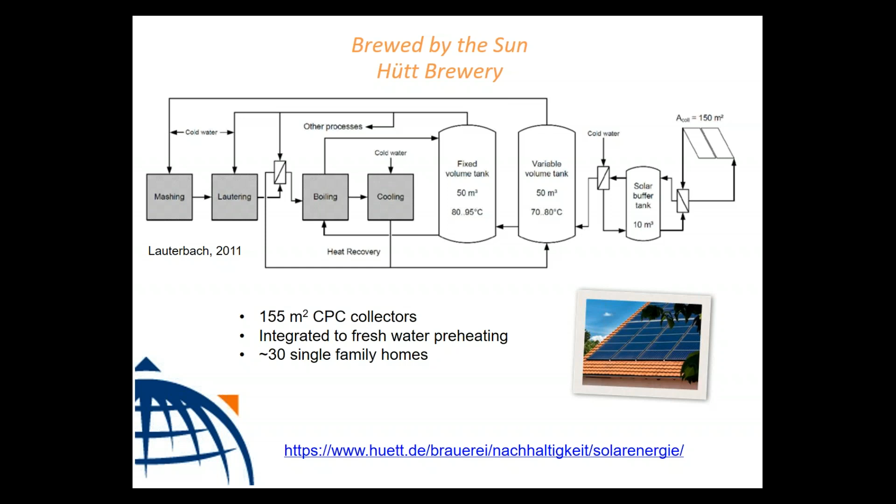If you want more information about this project, please check the link below, and also check out Project Green Foods, which is an EU-based project focused on energy efficiency and low carbon heat integration into the food and beverage industry within Europe. Next slide.

So the second brewery example here is the Hofmühl Brauerei, located in southeastern Germany in the Munich area. This was one of the first real large-scale solar thermal projects within Germany, almost over 10 years old now. This collector was extensively put onto the rooftop to serve a number of industrial processes within the beer brewing process.

Mainly the preheating of water, but also the heating of the cleaning-in-place tanks for the evening cleaning processes. The benefit of using CPC collectors, which stands for compound parabolic concentrator, is that these are a slight concentrating device with a mirror behind the vacuum tubes. The benefit of these is they allow for a higher temperature up to 130 degrees Celsius, which allows for a higher level of thermal storage.

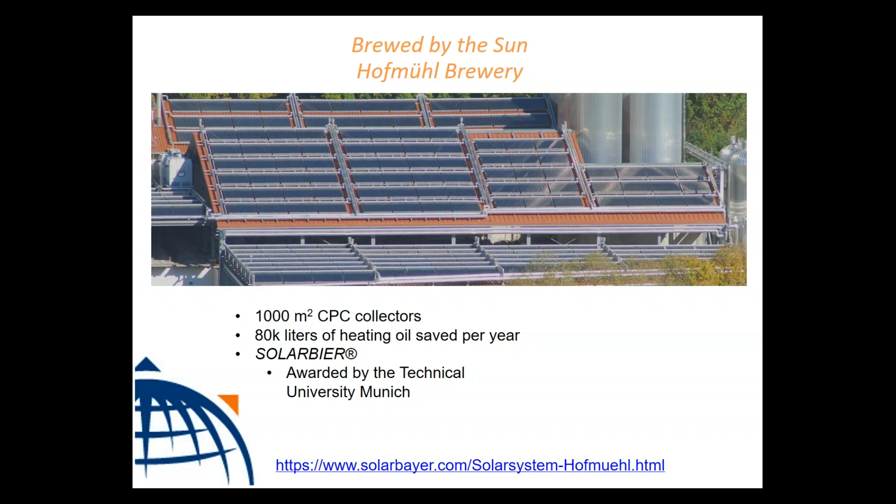Next slide. Finally, this is the Gösser brewery, located in Austria. This is quite an interesting project. There's been some good research done in this green brewing concept, available online, to find ways to make the beer brewing process as sustainable as possible, and to use as few fossil fuels as possible to generate the beer that we drink.

There are three unique aspects, or main heat sources, for this beer brewing process. One is solar thermal, and as we see here, there are around 1,500 square meters, about one megawatt of thermal energy possible throughout these flat plate collectors, hooked up to a large industrial storage in the background. What makes this project even more unique is that it's integrated with a district heating loop nearby, but also an on-site biogas project.

What they do here is use the waste grains, or spent grains, and put them into an anaerobic digester to make biomethane, which can be burned either in a CHP to generate both heat and electricity, or in a traditional boiler to generate heat for the various beer brewing processes.

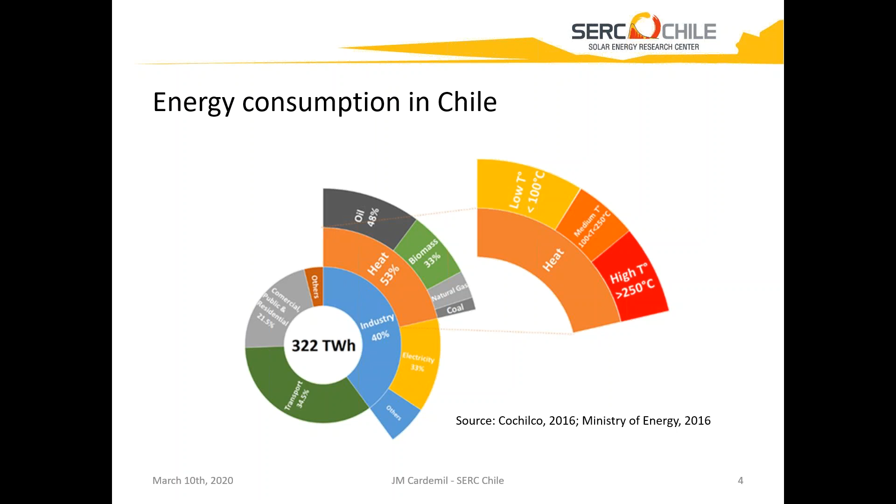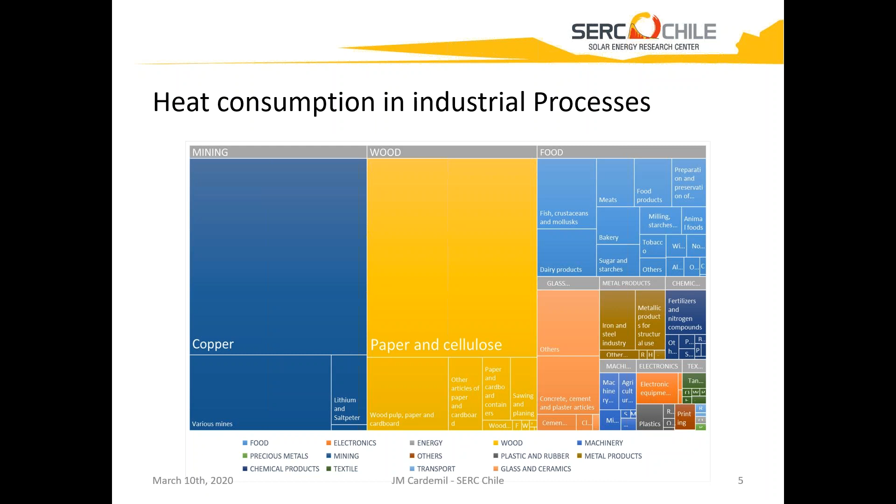Regarding the Chilean situation, it's really similar to what is happening worldwide, where about 40% of the energy is consumed by industry, and much of that energy is used as heat. But in Chile, particularly, most of the heat is consumed at a very low level of temperature, because the copper mining industry is the largest energy consumer in Chile, and they consume a lot of heat for their processes. The interesting thing is most of the heat consumed by the copper mining industry is about 40 to 50 degrees Celsius. So the opportunities for solar in these processes are huge.

Regarding the copper mining processes, I need to explain a little bit because it's not as common as, for instance, beer processes. The production process for copper depends on the ore being processed. Copper is present in the environment in the form of oxides or sulfides. The process for refining copper depends on whether you're processing oxides or sulfides. Sulfides require low heat for that process, except for the smelting process, which is highly energy consuming, but operates at about 1,000 degrees Celsius, so the opportunities for solar are not really evident there.

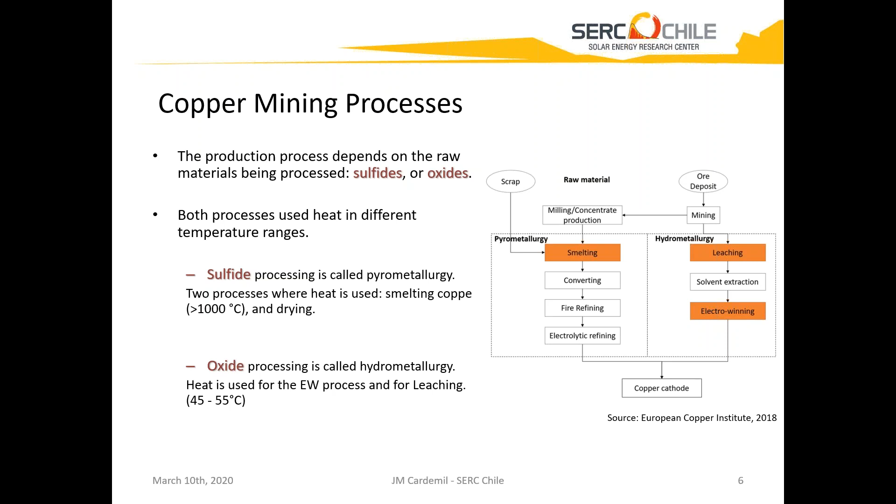But regarding the oxide processing, that process is called hydrometallurgy, and heat in this process is used specifically for the electrowinning process, and also maybe for leaching. That heat is used at about, as I said, between 40-45 degrees Celsius up to 50-55 degrees Celsius. So the opportunities here for solar are more than evident.

Particularly in Chile, besides the copper mining facilities, we also have a lot of sun. Chile has one of the highest solar radiation availabilities worldwide, and most of the copper mining facilities are located in the area where the highest radiation levels are observed. So we are not only producing copper, but we are producing copper in the places where the sun is available at large.

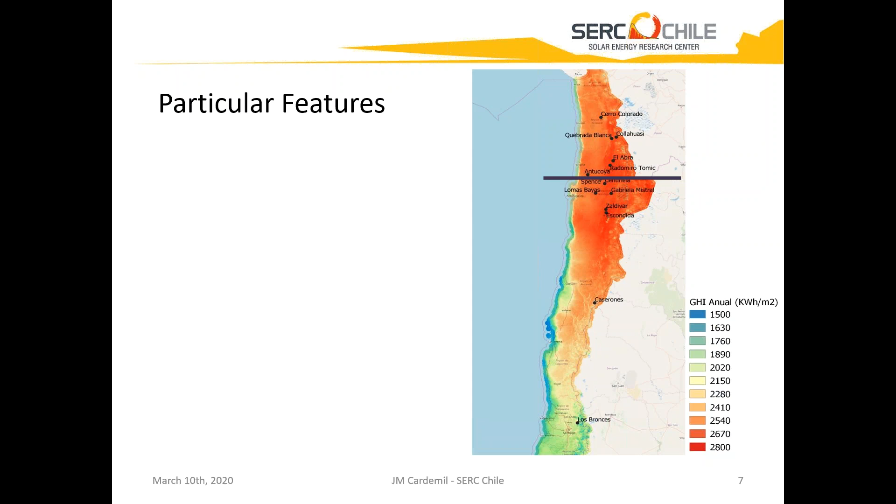But that also has particular features. I have a line on the map up there, because if we take a look at the topographic profile of Chile - I took a screenshot from Google Earth - you can see that the topography in Chile goes from the sea until almost 5,000 meters above sea level in a distance of about 250 kilometers.

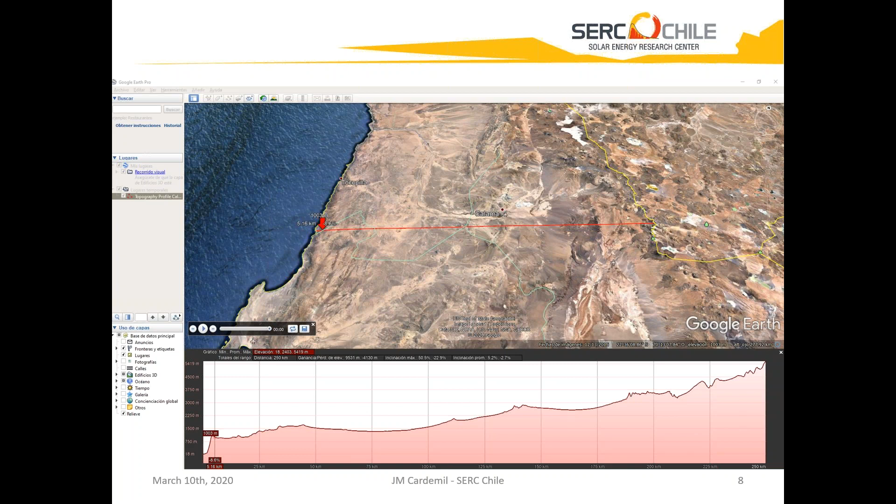What I want to show here is that most of the copper mining facilities nowadays are using fossil fuels for heating their processes, but they are bringing the fossil fuels from the sea, from a port, up to 2,000 or 3,000 meters above sea level where the facilities are located. So the opportunities are not only about the savings that solar can give, but also about all the savings we can observe in transportation, for instance.

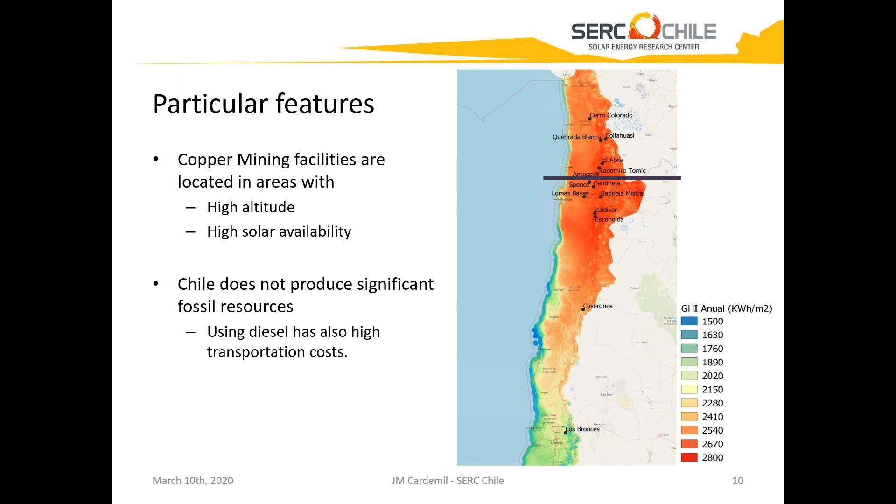So in summary, copper mining facilities are located at high altitude, and most of them have high solar availability. In addition to that, in Chile we do not produce significant fossil resources, so the opportunities are quite great.

So how is the process integration for solar in copper mining facilities? It's a very simple scheme where the solar field heats a storage tank, and using two heat exchangers, we can deliver heat to the electrowinning process. The electrowinning process is where the cathodes are produced.

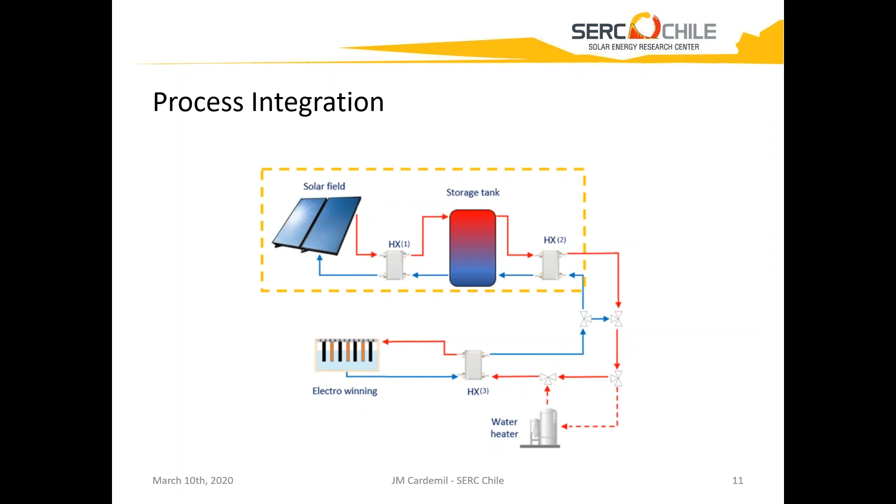So the idea is to deliver the heat during almost 24/7. Most of the copper mining facilities operate in that regime. So the storage tank and how to operate the storage tank is quite an issue.

Regarding the examples, in Chile we have two plants currently in operation. One located at Minera Centinela. They are using a small concentrating solar collector, a parabolic trough, but it's a small one. Actually, the absorber tube does not have any vacuum. They work using pressurized water as working fluid, and they have a 300 cubic meter storage size. The solar fraction at the design point is about 55%, and the fuel savings expected are about 55% too.

And the largest installation that we have is located at Minera Gaby. The mining company is Minera Gaby, but the solar company - a different company that owns the solar collectors - is Pampa Elvira Solar, and that company sells only the heat to the mining company, operating in an ESCO business model.

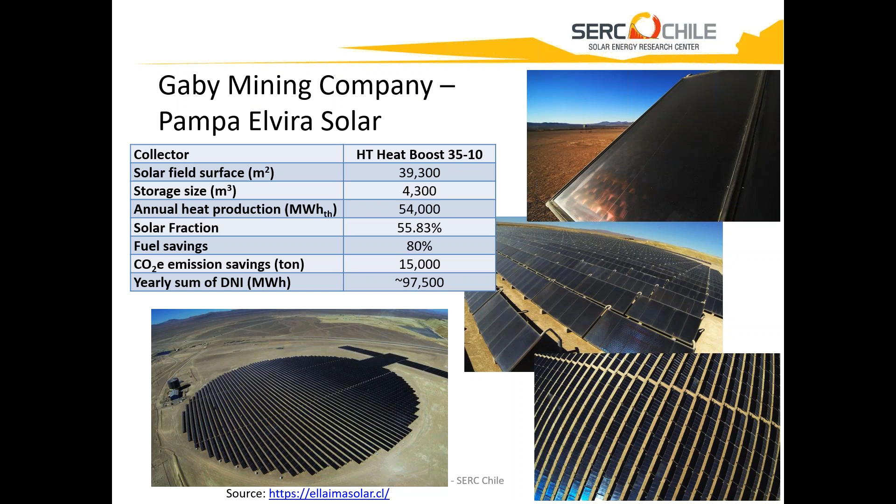The operation of this plant is very stable, and they are planning new installations for the upcoming years. New opportunities are also present because...

The currently operating projects are replacing heat from boilers, but new developments and researchers have demonstrated and proven that the use of heat in leaching and solution heating can increase copper productivity. That is part of the new projects in development nowadays.

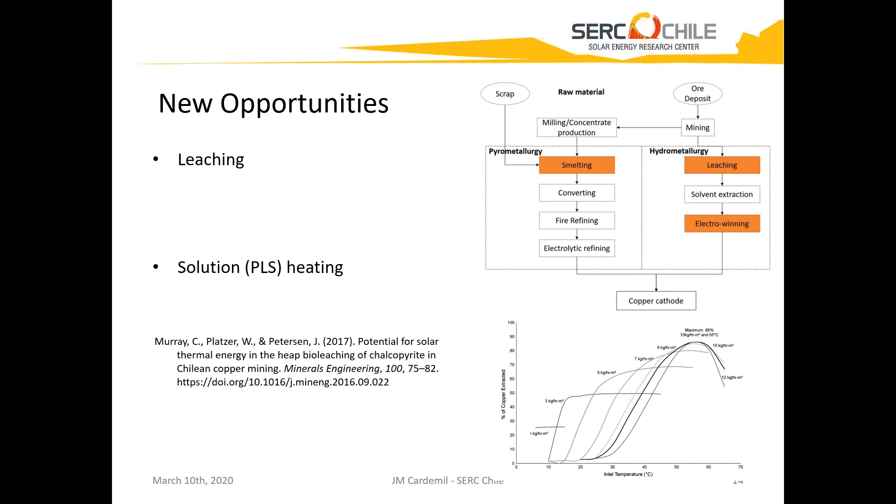But not everything is good. We have several issues regarding water use. We are in the middle of this desert, so water availability is quite an issue, and keeping the collectors clean is a significant challenge nowadays.

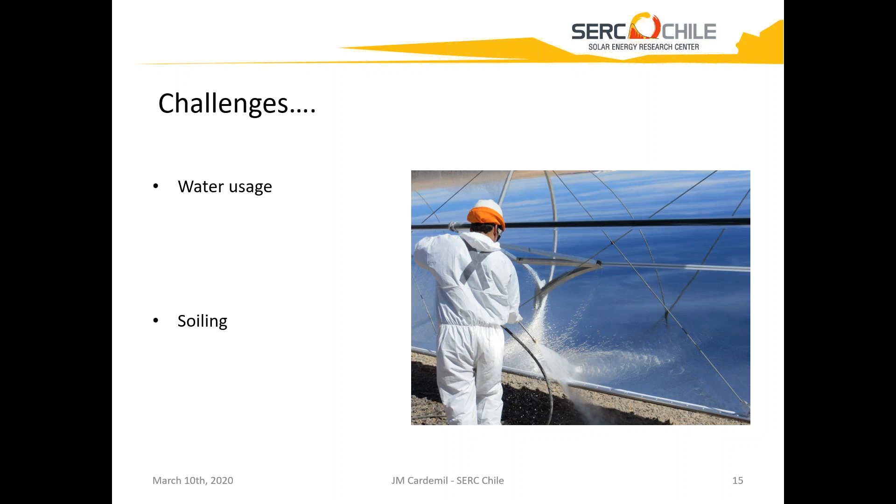So that is more or less what I wanted to say. It's a quick description of how the copper mining processes are and the huge opportunity that offers for solar. My team and I have recently published a paper where you can find most of the details, in Solar Energy journal.

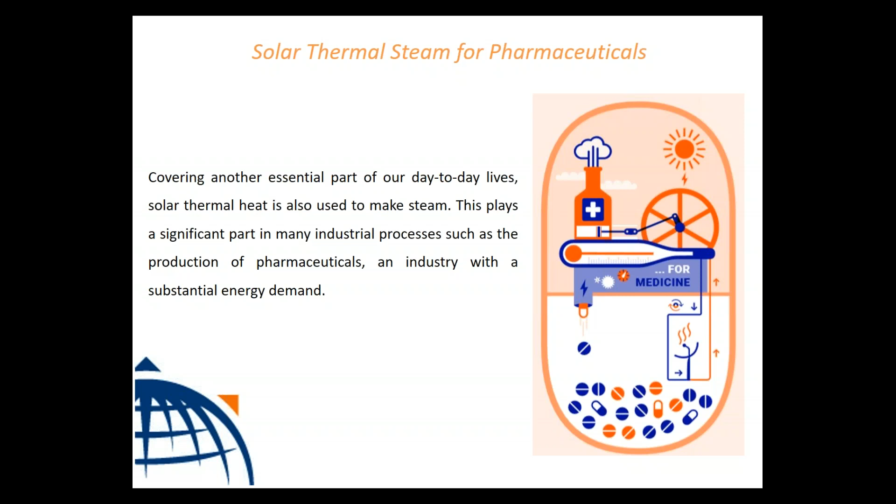Coming back to our infographics just in a second. Thank you for that second presentation on mining processes in Chile. Now we are heading over to the third and final presentation, which is going to focus on solar thermal steam, a bit different to what we've heard so far, for production used in pharmaceuticals. You can see the infographic we designed on the screen right now.

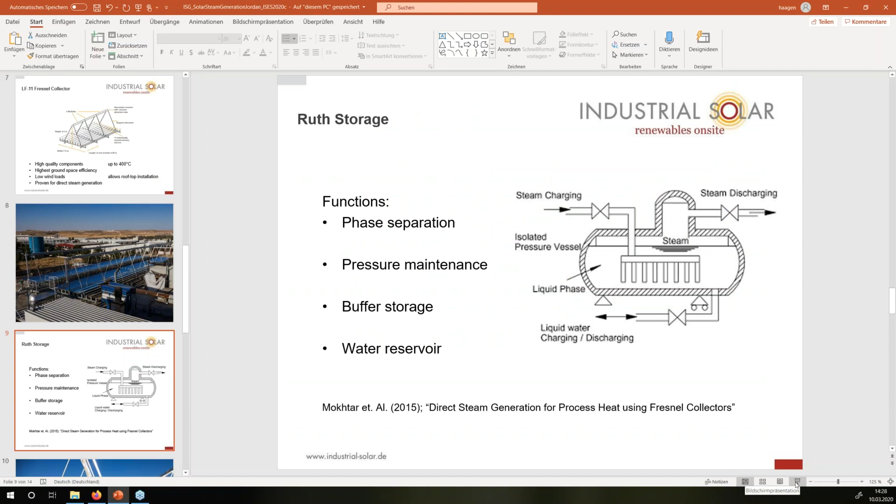Good morning and good afternoon from my side. As mentioned by Arabella, my name is Martin and I'm working in business development of Industrial Solar. For those who don't know Industrial Solar, we are a solution provider for solar process heating, and our solutions are mainly, but not exclusively, built upon the Fresnel Collector, a special solar thermal collector. You will see some more details on the collector later in the presentation. We are also not the only manufacturer of Fresnel collectors worldwide, but ours is specifically designed for applications in the industrial sector.

Today I will talk about projects in the pharmaceutical sector for solar steam generation in Jordan. So I'll briefly cover Jordan, briefly the pharmaceutical sector, briefly solar steam generation, and let's see how these things work out together very well.

A brief background on Jordan and the pharma sector. Similar to what Jose just mentioned for Chile, Jordan is also blessed with very high irradiation, so very suitable preconditions for the application of solar thermal energy, and unfortunately or fortunately, very high fuel prices, which for us as a solar thermal company makes it very promising to operate there. In addition, the country also has quite ambitious targets for renewables, and like in most other countries, these targets and progress on the electricity sector are a bit more advanced compared to the thermal sector. And again, in the thermal sector, we have to talk about industrial process heating.

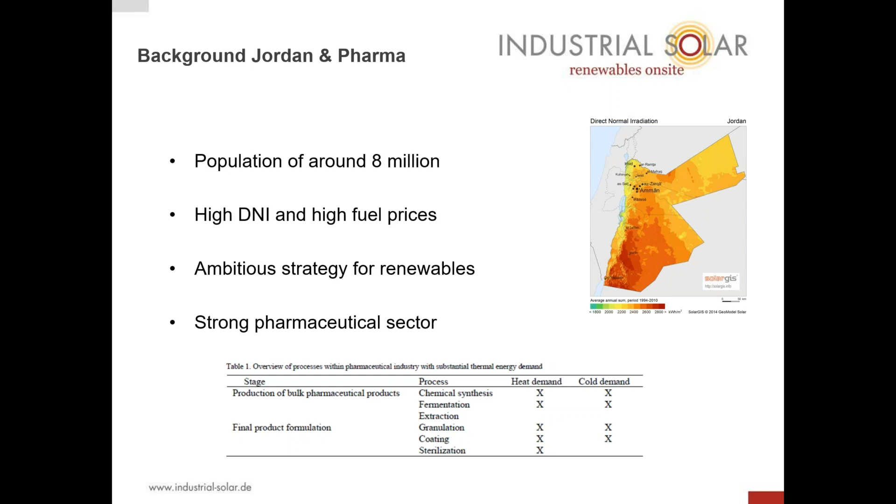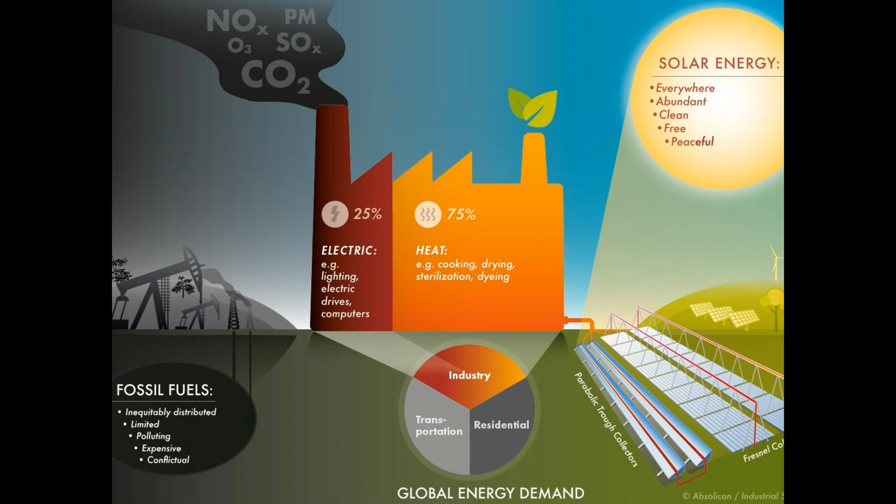A central steam supply provides all these different processes with heat at the parameters of the individual process. So what you see here also holds for the pharmaceutical sector, that most of the pharmaceutical energy demand is actually heating. This brings us to the project in Jordan, the Pharma project. As you see here in the middle, the demand for steam generation was also for Pharma, our first client in Jordan, the major single energy cost.

Pharma is a comparatively small pharmaceutical company, nevertheless operating for almost 3 decades nationally and internationally. Already several years ago, long before we implemented the project, they looked into green technologies and identified that, talking about emission reduction of their processes, they have to look into process heating. Process heating is, despite differences between the processes, especially steam generation, which is the single supply for all processes.

In addition, what was good for us, the company had suitable preconditions for the installation of Fresnel collectors, especially installation area. They had a suitable roof for the collectors, which had the ability to cover the load, and in addition was quite close to the boiler room where we feed in, and the load profile was also suitable. The project, installed and commissioned in 2015, was realized in cooperation with GIZ, the German Organization for Development Cooperation.

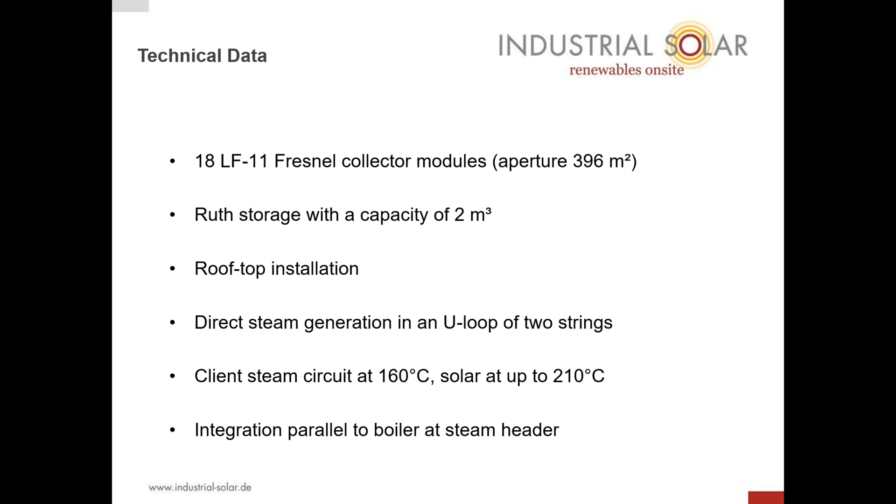So direct steam generation, already mentioned. What we do here is generate steam at up to 210 degrees C and provide steam to the client at around 160 degrees C. That's well beyond the highest temperature of their individual processes, but they distribute it as they have been doing in the past. The integration is parallel to the existing steam boiler. A bit more detail will follow on this part.

Very brief on our collector. This is what you've seen from the side and from below in the pictures before. The Fresnel collector is a concentrating solar thermal collector with uniaxially tracked mirror rows, 11 rows per module. They follow the sun, reflect the sunlight onto an absorber tube through which a heat transfer fluid is circulated and heated, and from where the heat is fed into the processes or supply grid.

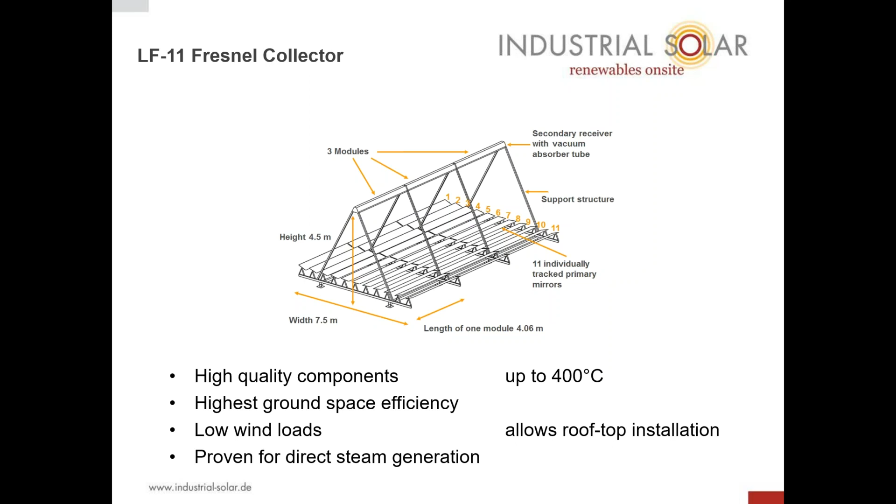For us specifically, we focus rather on high quality components, which allows us to reach higher temperatures, maybe a bit higher than some other companies, but that's not necessarily the only approach possible. If you design for other temperatures, eventually the collector would look slightly different, but I don't want to go into the details now. Another part I'd like to stress is that it's possible to install it on the roof due to the low weight and low wind load, which is again important for industrial steam generation where space is mostly constrained.

And here we come, as I mentioned, to the Ruth storage. For solar steam generation, I'd like to mention this because the storage is more than just a storage. It has several further functions which are actually necessary to operate the collector in direct steam generation mode, what we do. The water which circulates through our collector is the same water that goes as steam to the factory later. So apart from just storing, what the storage does in addition is it separates steam from the condensate, allowing us to charge or discharge dry saturated steam at the required parameters to the client.

It serves as pressure maintenance when the pressure changes within the collector and storage over time due to changes in irradiation and changes in offtake. In addition, it's a water reservoir, for example when we flush or empty the collector for whatever reasons required. These functions are crucial for operations.

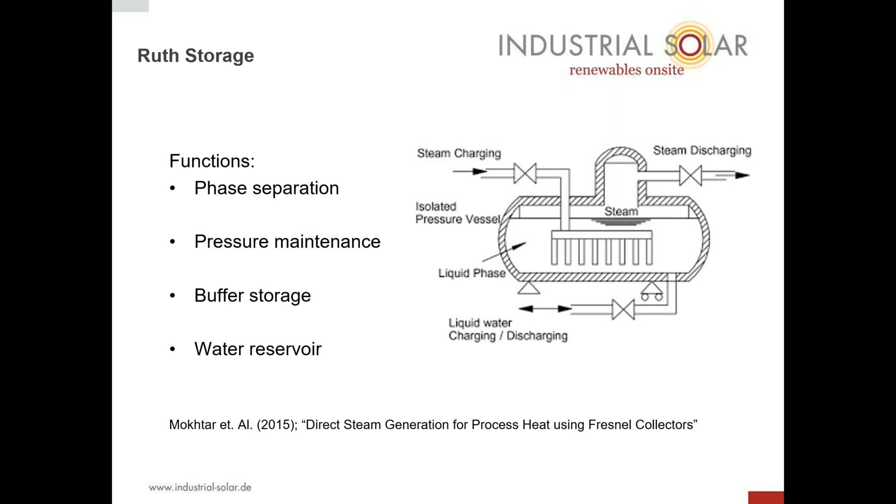Now, and I think that gets a bit more interesting for most of the audience, is that we have a closer look at the P&ID, simplified.

So here you see what I mentioned. In the center is the steam drum. The blue line takes cold water, meaning, for example, 130 to 140 degrees Celsius, from the bottom of the steam drum. Pure water circulates through the collector field, entering the first collector, and the mix of water and steam leaves the last collector. This two-phase flow goes back to the steam drum, where the phases are separated.

From the top, the steam is discharged via a pressure control valve to the factory, and from there it's fed to the individual processes. At the same time, if there's insufficient steam supply from the solar collector, the conventional fuel boiler, which is always in operation at least as a backup, meets the insufficient or missing supply that cannot be covered by the solar collector at a given time.

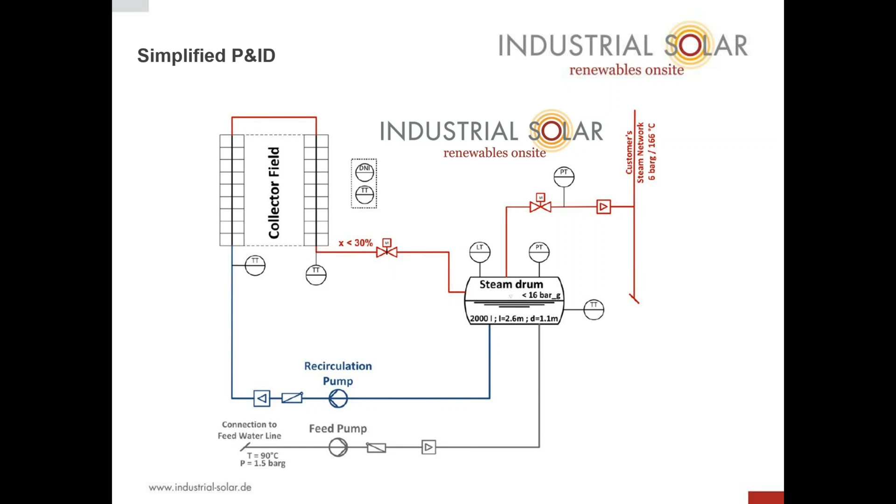The bottom line I want to stress: the yellow line is the irradiation, and you see it's fluctuating over the day. Clearly there is a fluctuating demand within the process, which we cannot show here because we don't control it and we don't measure it. But accordingly, there are fluctuations on the supply side, the irradiation, and fluctuations on the demand side, the offtake of the individual processes.

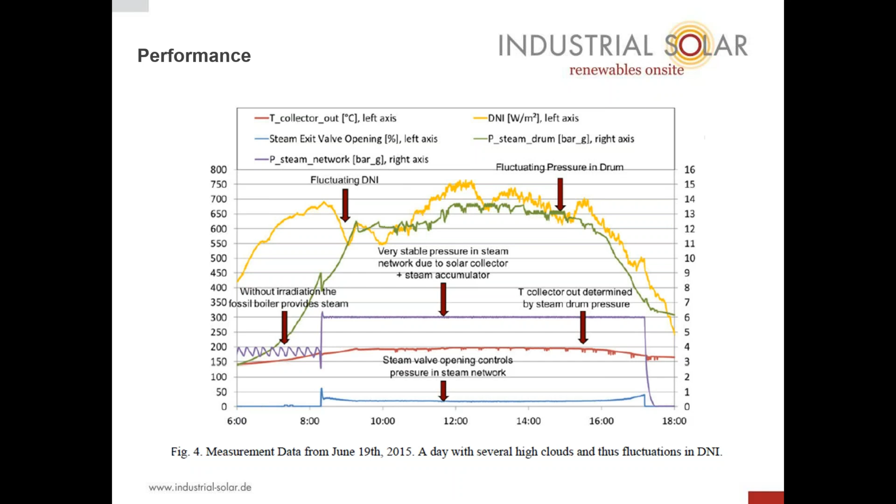Nevertheless, the violet line is the pressure, and as you see, despite these fluctuations of demand and supply, the pressure in the steam grid is actually very stable, more stable than in the early morning when the pure fossil fuel boiler is operating the grid alone. So often I'm asked, how does it impact my reliability? I say it's not affecting reliability negatively, quite the opposite. Actually, integrating solar steam generation stabilizes your steam supply in the factory.

That's already my presentation. Maybe summing up and coming back to the title, the topic of this presentation was solar steam generation for the pharmaceutical sector. I have talked very little about the pharmaceutical sector, and that's also maybe one of the key messages. If we would have another webinar talking about the food industry, I could basically use the same, because for solar steam generation, we do not need to look into individual processes.

Since the project was installed, none of the industrial solar employees ever entered the production area of the pharma facility. So we stay on the utility side, the supply side, and this gives great flexibility if, for example, one process is stopped for one reason or another, or if the processes change, the steam supply is still able to cope with the changes on the demand. This is a very important factor for the industrial demand.

Also, I would like to stress, since I stressed these positive parts, it's not the only technology we supply, and clearly you have to see what are the requirements of the individual off-taker, what are the constraints of the off-taker, to see whether or to which extent this technology makes sense for specific application. You see here a link to a video with more information, also with the off-takers speaking. Maybe their views are also interesting for you. I thank you for your interest, and I'm looking forward for your questions. Thank you very much.